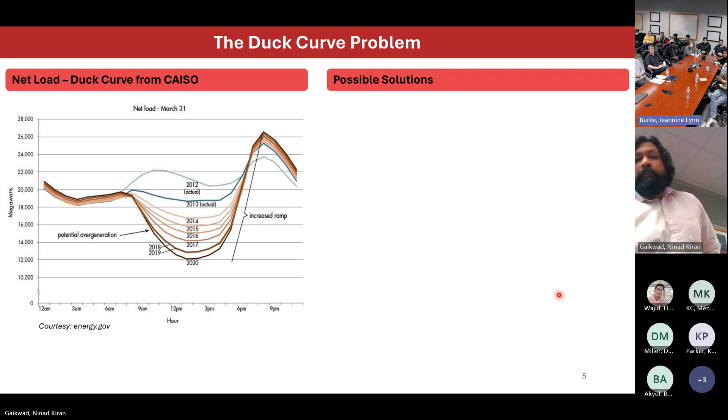As you can see, the net load curve, this is from CAISO, and this is a projection for 2020, and the actual was 2012 and 2013. The net load, which is nothing but the total generation minus the solar generation, the steepness during the evening time, the ramp up that is required, needs a lot of dispatchable generation. A few of the possible solutions are dispatchable generation like natural gas power plants, hydroelectric power plants, and energy storage at utility scale in the form of battery, thermal or chemical storage.

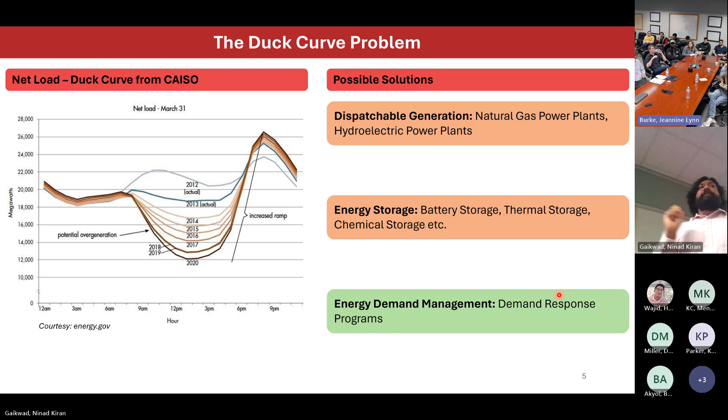But all these solutions require capital investment, and we do not want to use natural gas power plants to be fired if we want to utilize clean, green energy from solar. So there is another possible solution, which is energy demand management, or as we call it, demand response programs. Utilizing this in conjunction with the other two, we can try and solve this problem of the duck curve. In this talk, we will focus on energy demand management in buildings, or rather networked buildings at scale.

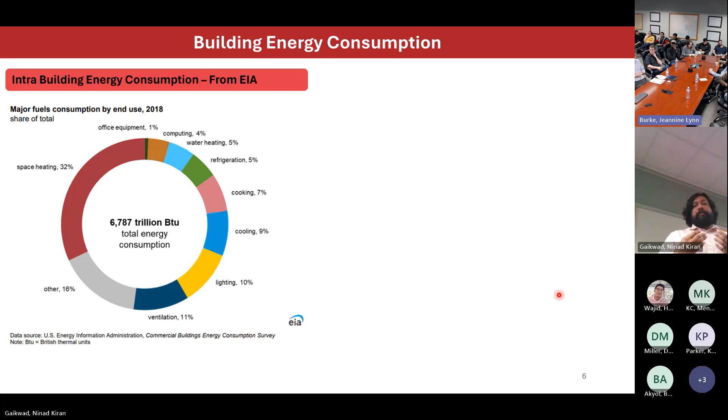So why buildings? What is so important about buildings? This data is from EIA - I always forget their acronym's full form - but as we can see, out of the total consumption within a building for different things, space heating and cooling is about 41%. So that is the HVAC system, which is 41% utilized in a building, and that provides us with a dispatchable load, because buildings have inertia. If you turn off the AC or the heating within a building, the temperature wouldn't change instantaneously, but rather it would take some time because the building has thermal inertia.

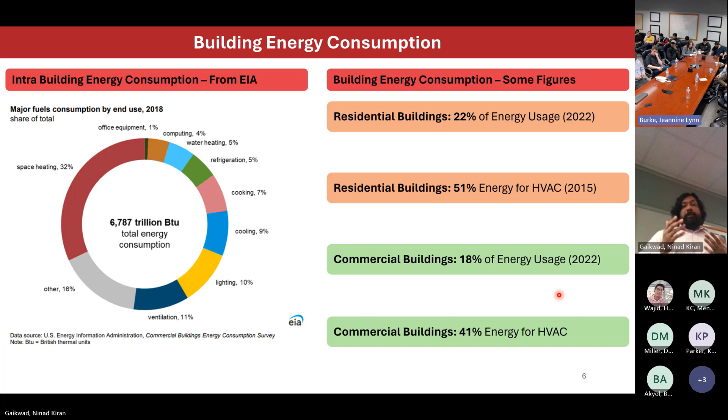This thermal characteristic of the building can be exploited in a demand response paradigm. The other thing to note is that out of the total energy usage in the United States in 2022, 22% was used by residential buildings, and out of that, 51% was used for HVAC. Whereas in commercial buildings, 18% of the total energy usage in the US was done by commercial buildings, while 41% of that was utilized for HVAC. So HVAC is a big consumer of energy, and if we can maneuver that, we have enough flexibility to help with the problem of the duck curve.

This comprises a building, which is not a passive thing, but rather an active participant in the energy grid. This building's behavior is basically dependent upon the ambient weather, how hot or cold it is outside, and what the people are doing inside of it. If we leave the building at 5 o'clock from a commercial building and go to our homes, the building energy consumption drastically reduces.

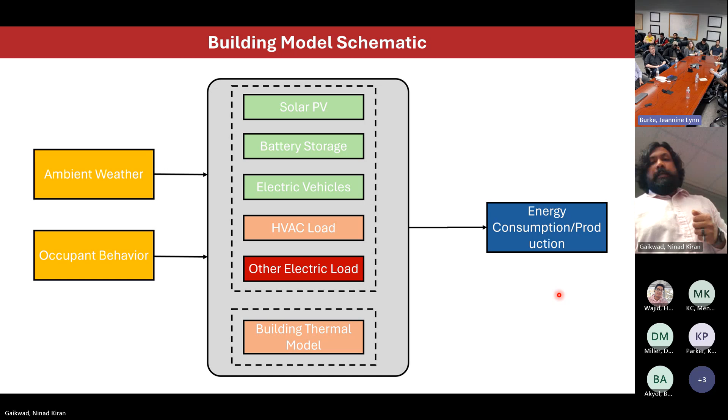So let us look at some simple models, starting with the solar PV model, which basically depends upon GK, that is the global horizontal irradiance, and TMK, that is the module temperature, where the module temperature is dependent upon TAM, the ambient temperature. Once you know the PV rated, meaning once you have the specification of the PV sheet, you have that model, end of story. You don't have to do much with it.

Similarly, a battery storage model can be shown to be something like this. It is a bucket of energy: the EBAT, or energy in the battery, at the next time point is basically what there was before, plus or minus how much was added or subtracted from discharging or charging. That's the battery storage model. If you know your battery, you would know from its specification sheet what efficiency it has, so you know the eta C and eta DC values. You don't need to do estimation for that.

Then you have electrical vehicles, which are basically a battery. The only thing extra in this model is PK, which indicates whether it is parked and connected, or not parked and away. Otherwise, it just acts as a battery.

The other electric load, like lighting and equipment, can basically be modeled as some schedule of that load. So for lighting in this room, the schedule goes from 0 to 1 from 8 a.m. to 5 p.m. And then if everybody leaves, we would like to switch it off. So S is the schedule of operation, and P rated is whatever the rating of your lighting or other equipment is.

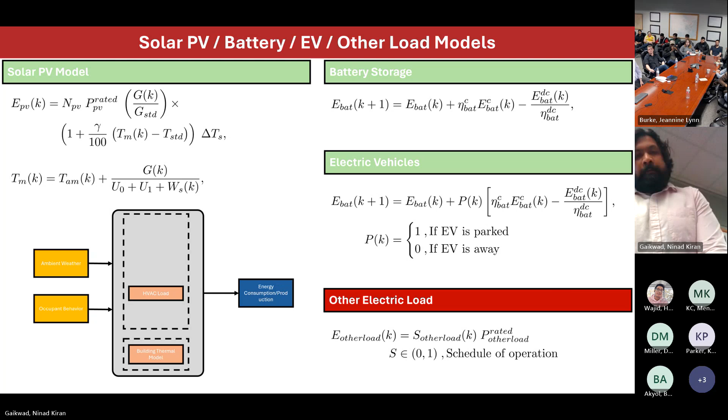Next is the HVAC model. Here we are very much interested in the PHVAC, that is the amount of electrical power the HVAC system is consuming in providing heating or cooling. In this talk, we consider that buildings are cooled and heated with electricity and not gas, just for simplicity, based on the work that has been done.

That PHVAC is some function of QHVAC, and QHVAC is the thermal energy required to provide heat or reject heat from a thermal zone. It is given by a physics equation consisting of Ca times the supply air mass flow rate m dot, the zone or room temperature, and TSI, the set point temperature of the incoming air. If that set point is hotter than the zone temperature, it will heat it; if it is cooler than the zone temperature, it would cool it.

A building thermal model can actually be very complicated, and we have an entire software called EnergyPlus which does a really good job of this. Heat equations are basically partial differential equations, but for us, we simplify the physics of the building thermal process into a 1D case, and hence we end up with ODEs, ordinary differential equations.

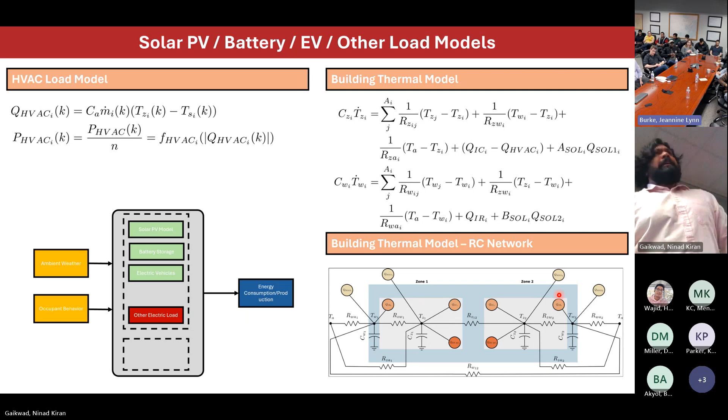Okay, is that clear? Yeah. Okay.

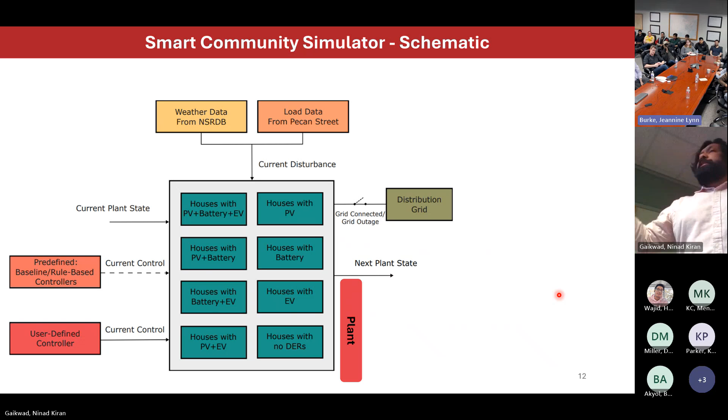So basically, having all that knowledge, we have developed a smart community simulator. It is in MATLAB, and the plant is such that you can simulate any arbitrary number of houses. Each house within that simulation can be heterogeneous or independent, can be a house with PV and battery, EV, just PV, or no DERs at all. The disturbances come from the load data for the house, from Pecan Street.

The weather data as a disturbance comes from NSRDB. We have provided predefined baseline and rule-based controllers so people can start using the simulator with baseline cases, and you can also define your own user-defined controller to control the simulator, or rather a group of houses. It can also simulate both on-grid and off-grid modes, and each house comes with an HVAC that you can choose to control or not, so it's very flexible.

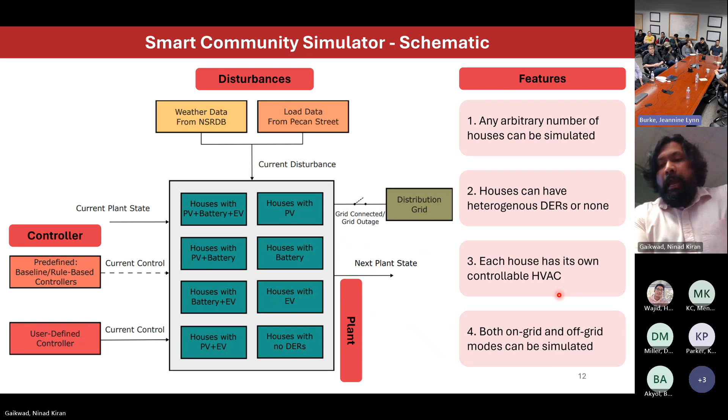So this is something we have built based on our knowledge of the models. And there is something we want to, or rather, let us look at some results too.

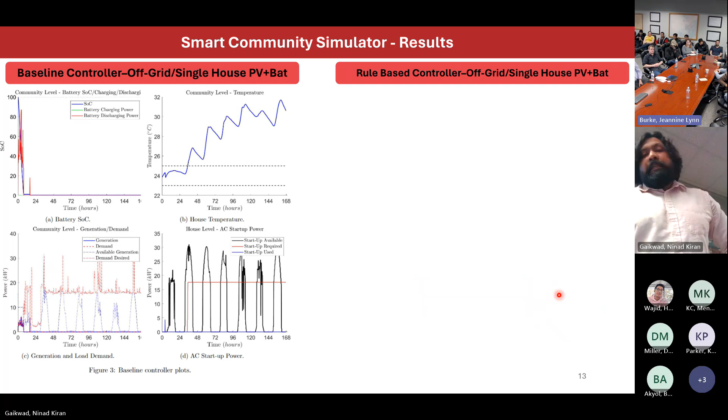All right, so the baseline controller — this is an off-grid case, just a single house with PV and battery. It's off-grid, meaning it is dependent only on its PV and battery for energy supply. As you can see, because the baseline controller is so dumb, nothing is served well — the temperature is not maintained, and the desired load is not served. So this basically shows that the simulator is providing proper physics.

At the time scale that we require it to be. Then we have the rule-based controller, which is a lot smarter than the baseline. You can see that this is better — the temperature is getting maintained somehow, and you are getting some desired load supplied by the battery and PV.

So this basically is to show that the simulator is ready if anybody wants to use it for developing certain kinds of applications. We have a simulator ready to do that for you.

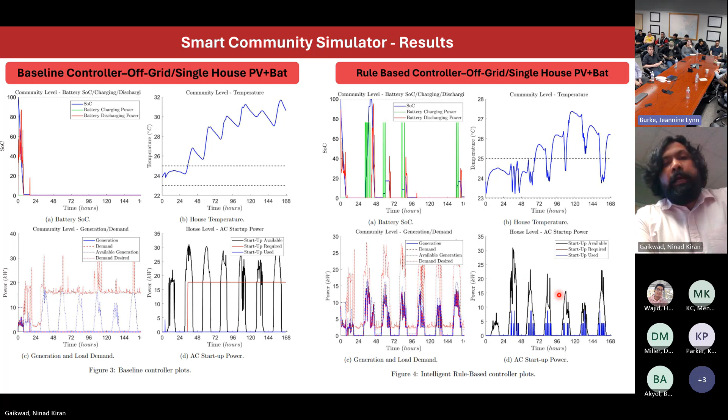The other thing we're trying to develop is a co-simulation workbench, where you will be simulating buildings, houses, smart communities along with OpenDSS. We will be using HELICS as the co-simulation enabler. We would have different Python scripts for recording the output of the co-simulation, and a particular Python script from where you can actually do the control.

Basically, that script would be an entry point to your control algorithm. We would definitely give you some basic algorithms like the ones we showed before, and all of this will be handled by HELICS. That is what we want to develop, so that we have this workbench going forward. So this work is in progress, and the idea is that any arbitrary number of buildings can be simulated here.

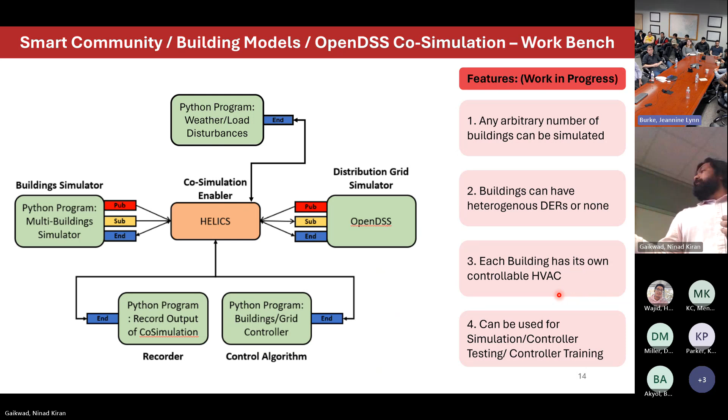Buildings can have heterogeneous DERs, or they can have none — they are just consumers. Each building will have its own controllable HVAC. This can be used for simulation, controller testing, or if you're doing data-driven control, this can serve as your gym environment, so to say.

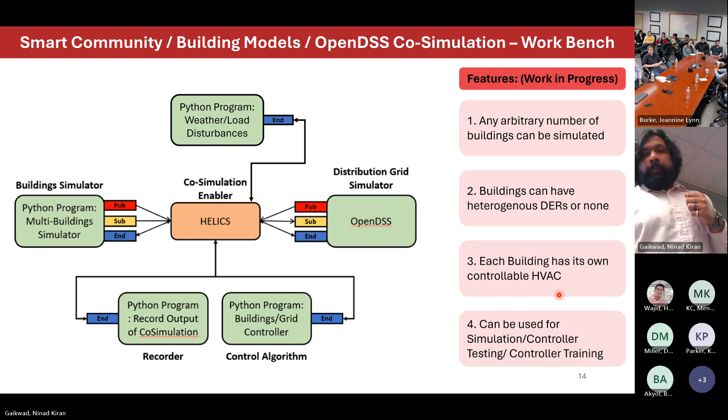All right, then we move on to model estimation.

All the models we looked at, like the solar PV model, the battery model, and other load models, we can just find from specification sheets and by knowing a little more about our building. But the thermal model, the RC network that you saw, is difficult — you cannot just get it, nobody is going to just give you the RC values. You will have to get some data, create your model, and test it. Once you have that model, you can do all those things in the simulator that we just saw.

So how to do that is basically model estimation. And what we do here is, because of a lack of real building data, what we started off with is the PNNL's buildings database.

This is a database of 16 different prototypical commercial buildings, and it comes with 19 different weather files. There are also some residential buildings, and two other kinds of buildings present.

What we do is use those files and pass them through EnergyPlus, and EnergyPlus gives us data. This data we process - basically the occupant and equipment data inside, the weather data, the HVAC loads and zone temperatures - all the data that will help us build the model further down the line. So data processing is done once you generate the data. We'll talk about it in the next slide, what we exactly do.

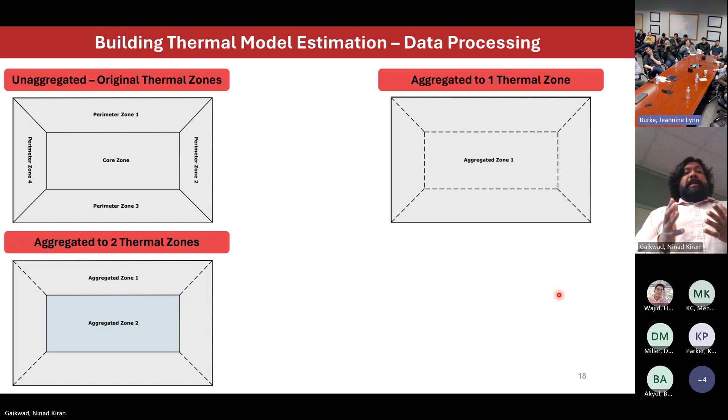For that, we basically start aggregating the zones. If you aggregate all 5 zones together as an average, you get one set of variables for this aggregated zone. Similarly, maybe you decide that's too bad a model fit and it can be done with 2 zones. Due to the symmetry of this building, you can consider the central zone to be one particular zone, and all other perimeter zones can be aggregated - giving you a two thermal zone aggregation. Similarly, a 3 thermal zone aggregation. And you can see why not a 4 zone version, because there is no symmetry to do that exactly here.

Out of this, the whole idea is: if we are able to get a single zone model for any particular building to work well for our energy control application, then we are very happy. If not, we have other ways of aggregating it and still coming up with models, which are a little more complicated and will take more memory and more time to solve.

Then let's say we have a multi-zone building model. There are 2 ways you can train or estimate the model. You can individually look at, say, perimeter zone 1 as an independent or uncoupled zone, and just learn an RC network model for it - basically learning an RC network model for each of the zones independent of each other. That would be an uncoupled architecture, which should basically give you bad results.

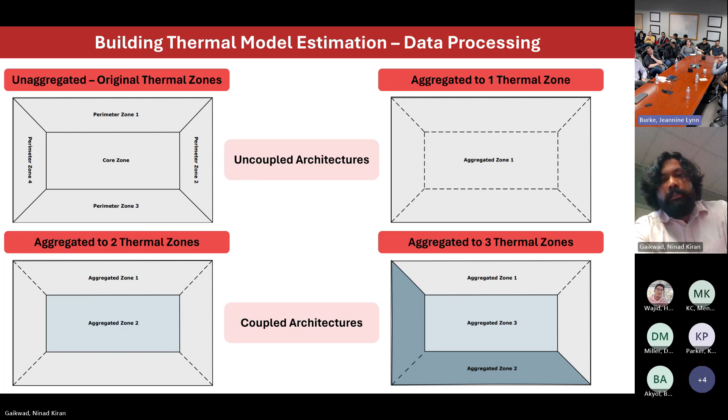Okay, so that is how we process data, and that is how we can develop our models. Going further, this is some modeling. We can return back to it if we have any questions, but for now, I think this should do.

So the idea is, once we have learned, if you can see this over here, this is the thermal model. This can be either learned through an ANN model, or we can learn the RC network directly through gray box techniques.

But this entire thing is showing you a simulator of a single building, which will be present in the HELICS co-simulation platform. The way it would operate is, you would have inputs going into the building, which are ambient temperature, solar irradiance, that is weather.

Then you have all the disturbance coming from people and equipment, and then definitely the HVAC control that you can have. And this input is exactly like EnergyPlus.

And this input is then getting converted into all the different kinds of heat gains that a zone or the building might experience. QSOL 1 and 2 are the heat gains due to solar irradiance. QIC and QIR are due to internal heat generated from people and equipment. And then QHVAC is the heat rejected or accepted by the HVAC system.

And in order to get the other four, QSOL 1, QSOL 2, QIC, and QIR, you have to create some regression models so that you can go from the EnergyPlus inputs to this QSOL. So we have to learn that, and EnergyPlus helps us learn that. We learn those regression models to generate QSOL 1, QSOL 2 from GHI, for example, using EnergyPlus data.

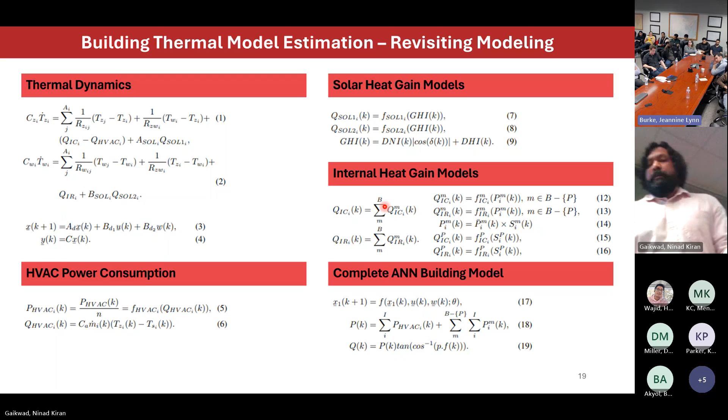So keeping that in mind, there are different ANN architectures that we are currently trying to test out. And this is no standard nomenclature that I have used. So I call this one time stepper 1, and it is not a neural state space model.

So basically, it is a vanilla neural network where X, U, and W become the complete input vector, and you learn some theta because you know X1 from your training data. So that's time stepper 1. It's like your network gives you the next time step state directly.

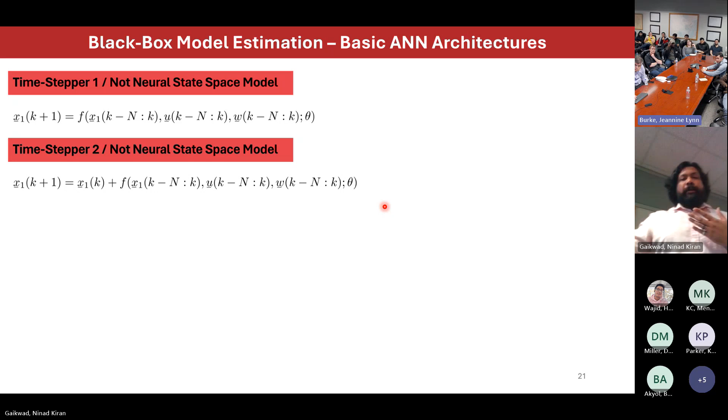The other one is the same thing, but your network now tries to actually learn the derivative of it, and you have to add the previous state to it. This has a kind of smoothing effect on the training and also the results. So this is time stepper 2, but still not a neural state space model.

So time stepper 1 and neural state space model would mean I will train two different models.

Sorry, it seems that somebody has a question. Do you want to take a question now or at the end? Which one do you prefer? Sure, I can take a question. Maybe see that, I don't think I can.

Hi, can you hear me? Yes, all right, great. Thank you for this presentation. This is Bora Akyol from PNNL. I missed a step here.

You described how we can model buildings relatively well, and we have been doing that for a long time using mathematical models. And then you jumped to the neural networks. I missed the motivation for why we would want to use a neural network to model the building space. So can you please say maybe a sentence or two about that motivation?

Thank you. Right, okay, that's a great question. Yeah, sorry that I didn't provide enough motivation for why we should use ANN architectures, or why shouldn't we just go to gray box modeling.

So the thing is, I'm trying to replicate EnergyPlus's model into a particular model so that I can use it at scale, with multiple buildings, in a co-simulation platform, which I wouldn't be able to do with EnergyPlus given the computing hardware I have. The idea is that with the machine learning training paradigm, you can use a lot of data to train it, unlike a constrained optimization problem to learn the RC parameters, where maybe you can do it with 3 to 6 days worth of data and it is good locally.

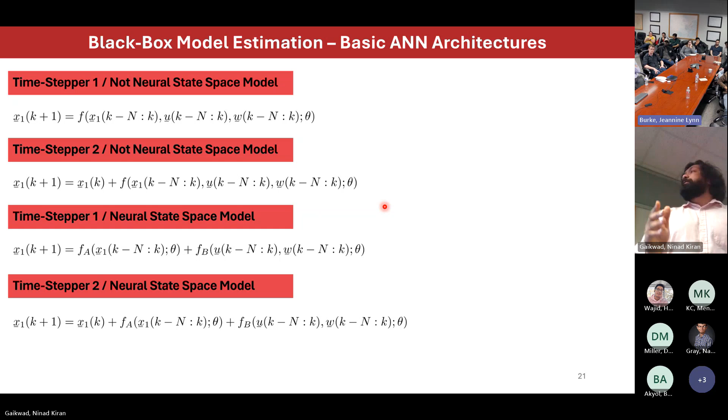This entire exercise is also because there is no central place where we can see that all of these have been applied to building data and see what results we get. So that is one motivation to look at all these different models, because I don't know which one is going to work better. But in literature for dynamical models, these are the basic ways you can train a neural network to do that.

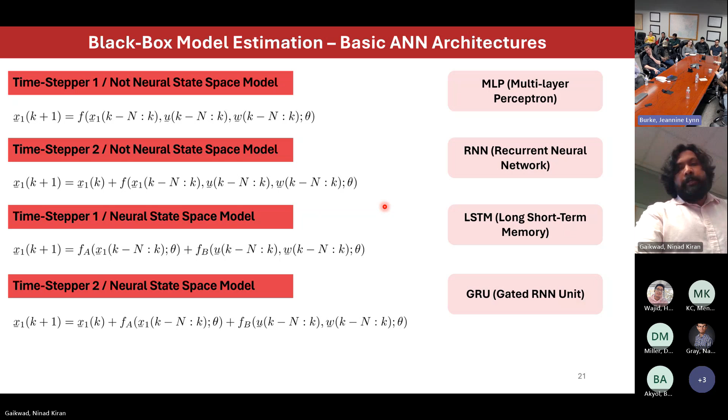Okay, any questions? Okay, let's move on. And then you can use MLP, RNN, LSTM, GRU. That is what I'm using to populate those models in a particular way.

If you look at some results, these results are for time stepper 1, not a neural state space model. Each row is the different kind of neuron used to create the layers, and the columns represent the aggregation zones—this is still the 5-zone building, the small office 5-zone building. The blue color is for the coupled simulations, the red color is for the uncoupled simulations, and the black is the actual temperature.

Just having a look at it, you can see that the coupled version learns it better. The weirdness you might see in the other ones is because we haven't done hyperparameter tuning properly, and we have also restricted ourselves to the data—we haven't messed with the input or schedules so that we can get richer data out of the generator. So there is some scope for improvement, and we are working on it.

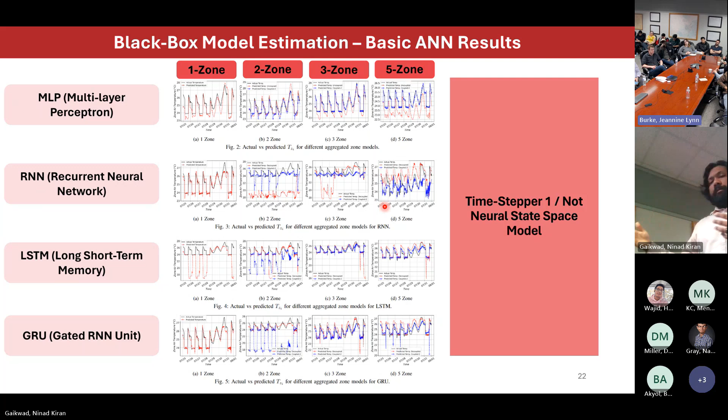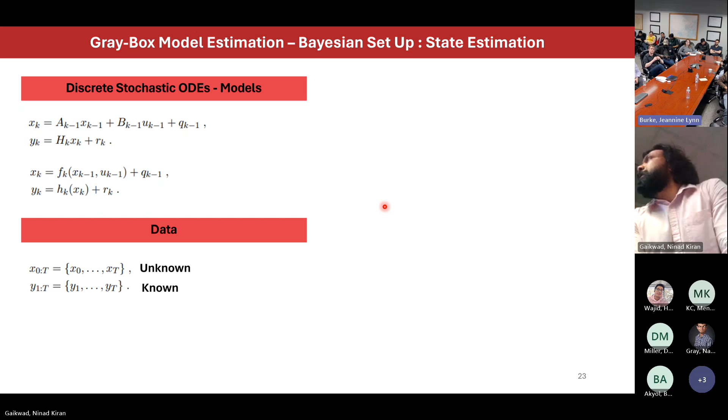All right. Okay, gray box model—this is something we are trying to do, and we're very open to suggestions. Basically, discrete stochastic ODEs—apologies if that's not an exact stochastic equation—but the QK and RK are Gaussian noise processes, not processes, but rather distributed with a zero mean Gaussian. If you can represent your ODE in this fashion, which we can do for our linear ODE system for the thermal dynamics, then you can learn these parameters with a Bayesian setup, and that is gray box model estimation.

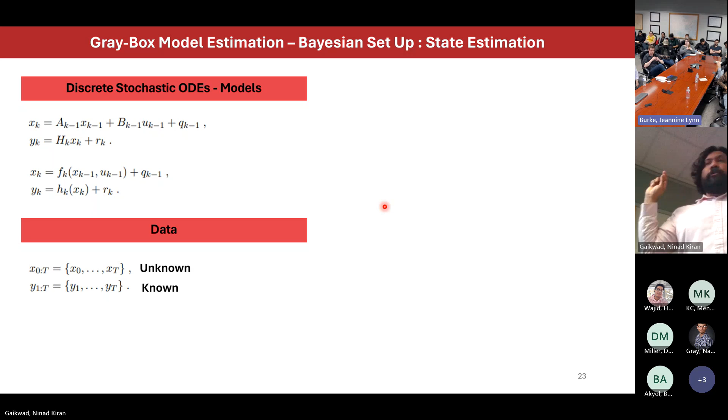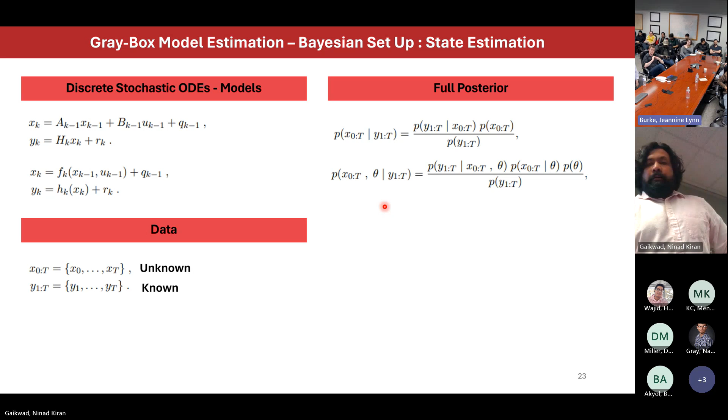Where the data is such that you can only know the output, and the output is the measured quantity, which is just going to be the zone air and not any other temperature state that you might model. Basically, a Bayesian setup means that you compute the full posterior and then work through it, and the way to work through it is basically through Bayesian filtering and smoothing.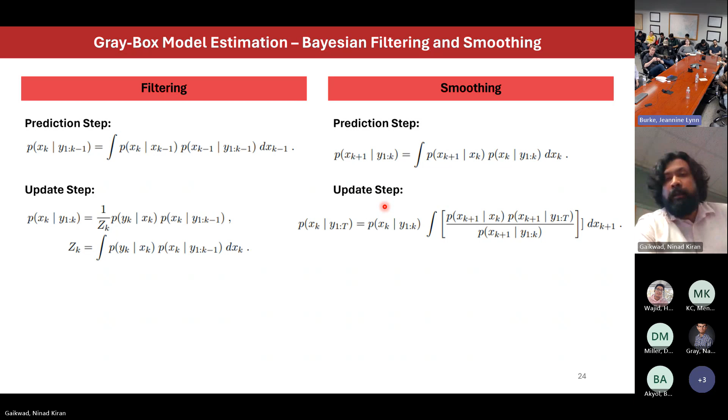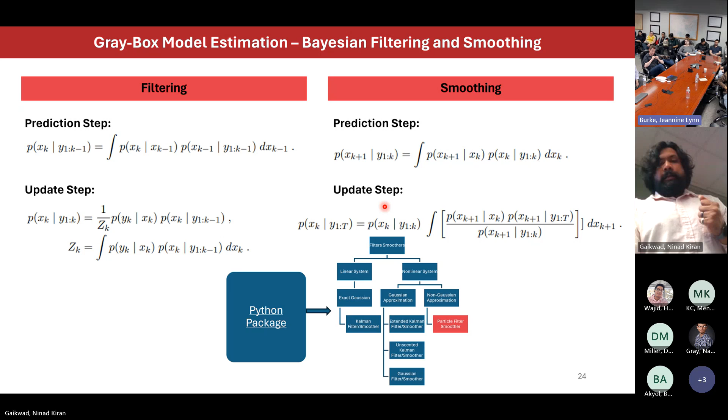These help us in doing at least the state estimation. I'll be sending out this PPT, and there is a link to a GitHub repository if you want to use the Kalman filters. We have developed almost all of them, apart from particle filters—all the filters and smoothers—and I think it's a good package to use if you need it.

So the other setup is what the actual problem is. We are in this model estimation paradigm, and we saw that through filtering and smoothing, we can at least estimate the state. But we want to estimate not only the state, but also the parameter. Then the setup becomes a little different, where you need a prior on your theta, and then you have everything conditioned on theta as well. Over here, you still don't know the hidden states, you don't know the parameters, but the only thing you know is the measurement coming out. It's a difficult problem to think about.

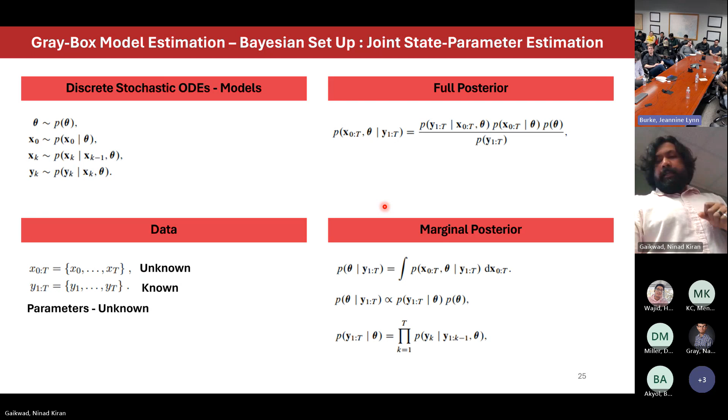Even over here, you have the full posterior, and then you get around it through the marginal posterior, and you work through it, and you see that the filters and smoothers help us later in actually computing this and coming up with the joint state and parameter estimation.

So the algorithms currently, our work in progress, that we are utilizing, I would call it a naive NLP. I'll go fast, if anybody has any questions, just raise your hand or shout out. But yeah, this is a naive NLP. It is a constraint optimization problem.

It's to minimize the squared error between what you have observed and what you would be estimating as y. The constraints are nothing but your dynamics and the output equation, and then you have constraints over your states if you know what constraints there should be. If you know some good bound constraints for your theta, they are welcome too.

The other one we are trying to see is the state augmentation method, where you basically augment your dynamics with your parameters and then utilize the filter to simultaneously estimate state and parameter. It is not a foolproof solution, but it's something you should start off with. If it works for you, it's good. But we will have a more concrete discussion once we have all the results ready.

This is one of the easiest ways to set it up if you have that package, or your own package for doing Kalman filters or other types of filters, because here the filters wouldn't be Kalman. They would have to deal with nonlinear systems as the state would be augmented.

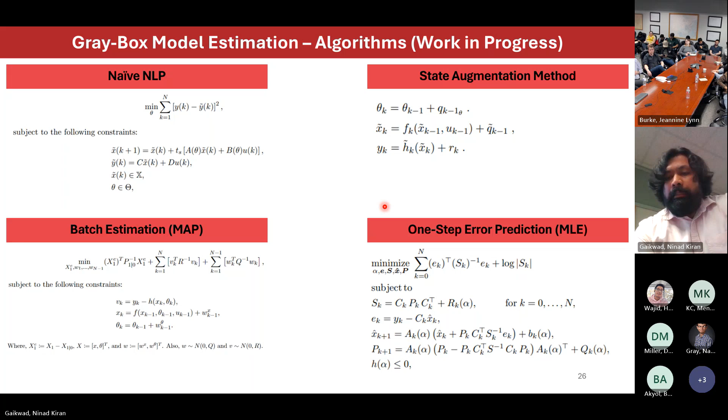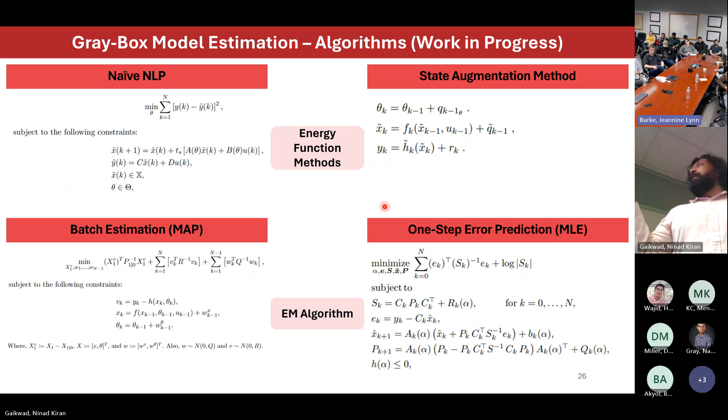The other things we want to work on, compare, and see which ones to go for are energy function-based methods and EM algorithms. For brevity, I haven't created slides for the mathematics of it, but we will have results for those as well. So these are all the algorithms we're trying out on the building data we generated from EnergyPlus.

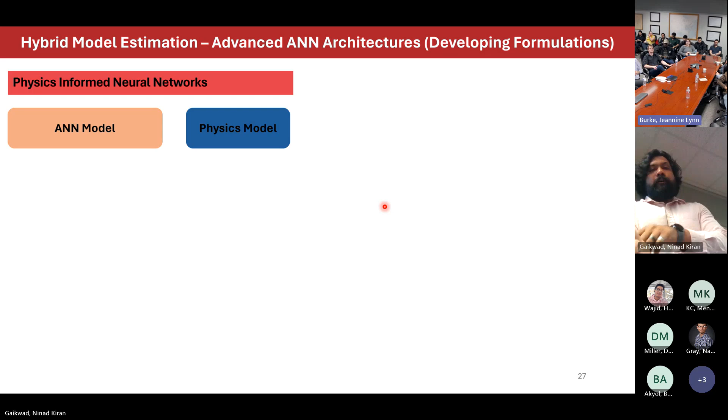Then I would like to move forward by going into physics-informed neural networks for the future. We have a really good candidate, neural ODE, and I would like to see if there is any extension possible with physics-informed neural ODE.

I'm trying to develop a formulation for the PINN, and given the kind of problem it is, because it's an inverse problem for me as well, since I do not have access to the RC parameters, and I do not have access to the state either, it's a little tricky how you could get that to work, at least for me at this point. So these are hybrid models combining both machine learning and physics, and I plan to work on them, get a good hold on them, and come up with some results.

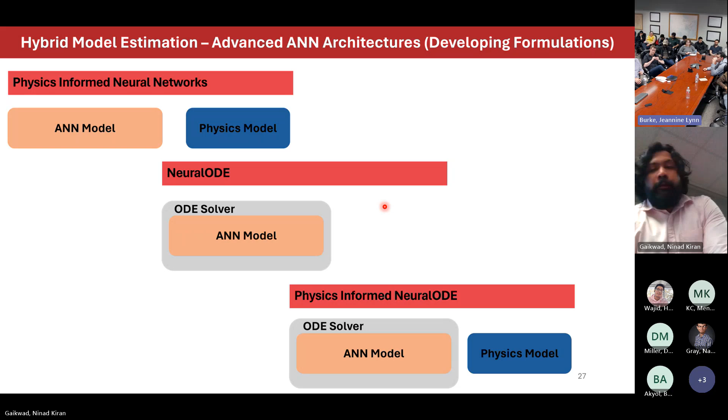Any questions? Is this the last slide? Yeah, five minutes, five to ten minutes. Is that okay? No, that's good. No, because you asked the question, I thought that.

All right, so we have looked through the mathematical modeling.

We saw that we can come up with simulators and test benches and stuff. We saw the elephant in the room is the thermal model for this large scale simulation. And we saw a few techniques we can use, from gray box to black box, to identify that model and convert it into a simulator so we can use it in our application. So now we should look at what the control is, like how can you actually do the control if you have all of these things.

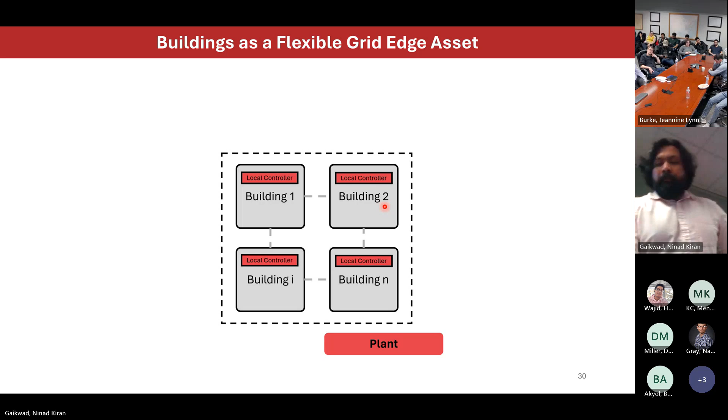The disturbances, as always, are ambient weather and occupant behavior. And the objectives are, what do we want this system to do for us? We want it to produce some ancillary services, like help flatten the duck curve. We want the buildings to reduce energy cost, and the most important thing, do all of these things while maintaining occupant comfort. Otherwise it wouldn't be a good control strategy.

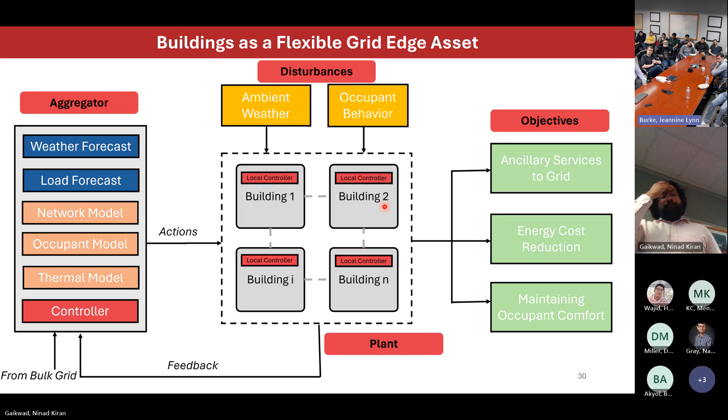So how would we do that? We are envisioning - well, this is out there in literature - how we model the aggregator. We're not there yet, but we think an aggregator would need to have some kind of weather forecast. It would need to do some load forecast. It would need some understanding of the network model. It would need to know about the occupant model, and definitely the thermal model. Based on all these models and forecasts, it can come up with a controller which can send an action.

And for us, the action would be a price signal sent to the buildings. And the local controllers would take that into cognizance and change their behavior. The price signal would be such that the aggregator is the real intelligent guy here - he knows the buildings he's controlling, and knows exactly at what price point he can get this group of buildings to do what he wants. That will be a kind of a game between them.

And that is what we envision happening. For that, we are trying to get everything built. That was the purpose of this talk, to show what we are trying to do and where we are at. So this is what we intend to do, slowly and steadily.

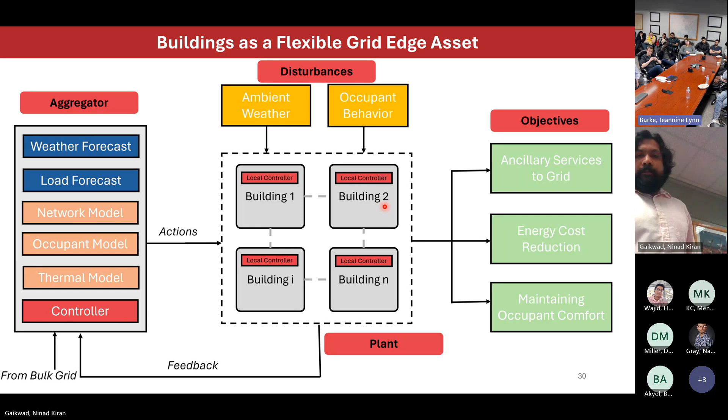The other thing is, what kind of control are the local controls? I'm not going to touch the aggregator at this point, but what is a local controller, what is an intelligent local controller? An intelligent local controller has to be based on some kind of optimal control paradigm. The easiest ones to understand, or rather currently applied to buildings, are MPC, model predictive control, and RL, reinforcement learning. So we'll see a use case of each of those quickly.

So model predictive control for a small house. Model predictive control converts a control problem into an optimization which it solves at every step. It takes in information, it has some future information, it has the dynamic models - over here the dynamic model is the refrigerator, because this is a small house. The objective is basically to maintain habitable conditions inside the house with just a small solar PV and a small battery system, after a hurricane has hit and they don't have access to the grid, and might not for the foreseeable future, like Puerto Rico - six months, who knows?

But they have the system, and we need to come up with a controller to help them basically survive. Survival here would mean my food doesn't go bad, so my refrigerator is always almost served. And then I should get light during the nighttime, and maybe a fan when I sleep, that kind of thing. So it is a small system.

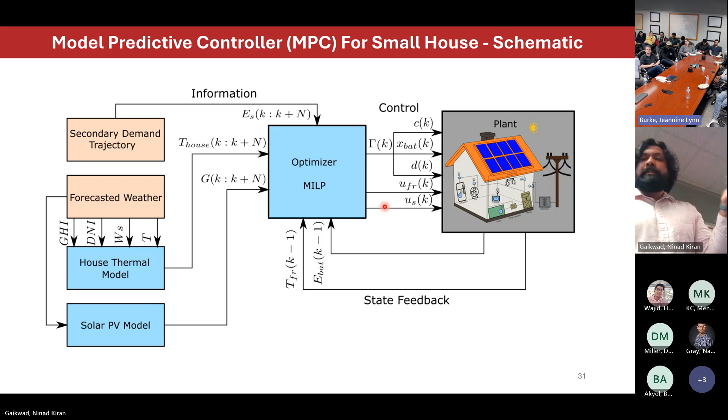And then it can be formulated as a MILP, or mixed integer linear program, because of the on and offs that have to be done for the fridge and the secondary load, which is nothing but the lights and the fans. And it turns out to be a MILP.

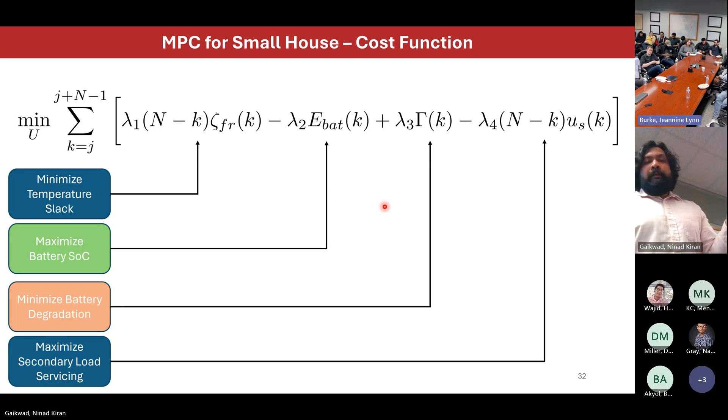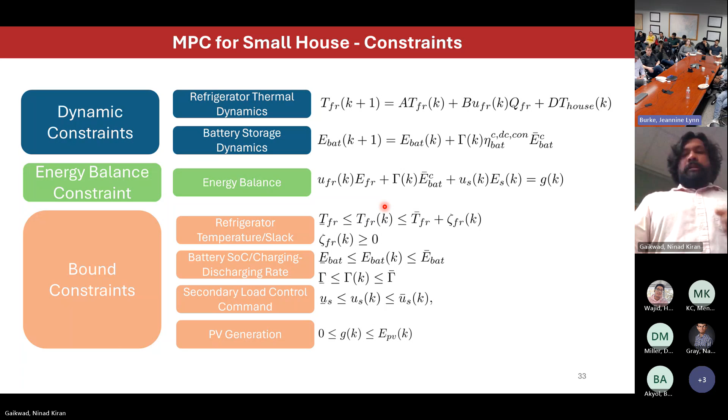And you have a cost function—I won't get into it—that tries to achieve the objective I just said. You have some constraints, which are nothing but dynamic constraints: the dynamic model of the battery, the thermal model for the refrigerator, an energy balance constraint, and a bunch of bound constraints so you can tweak the solution the way you want.

So this is what we got. The columns represent the controller, the rows represent the primary load, which is the refrigerator, and the second row is the secondary load, which is the combined lights and fans that were served.

And if you can see, the MPC controller did better than the baseline. It was able to do better because it had some future information. It was based on an optimization problem, and it could make good trade-offs like we do when we have choices—we make good choices because we have intuition. We can see the future through either data or the dynamic models, and hence the models are very important for model-based control.

I think me and Shishir worked on a paper recently. I haven't put the results here, but we have controlled HVAC in a house in a certain kind of situation—a more complex problem. We can discuss it later. But yeah, this is the MPC for this house.

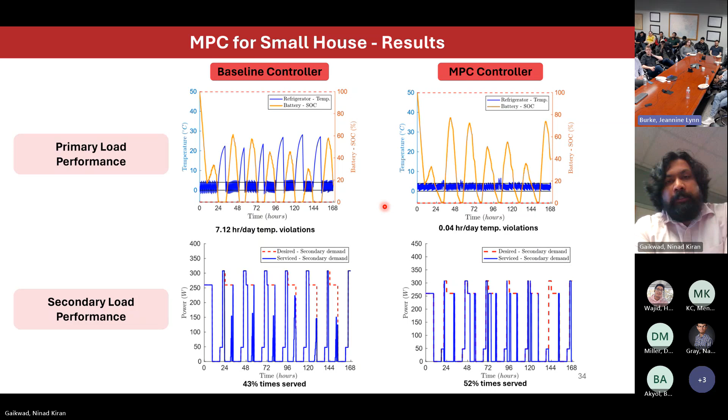Now, a similar problem: you have this house, you have this controller which is based on MILP. I used Gurobi to solve it—Gurobi is a commercial solver—and I used a good machine to solve it. And you wouldn't want to have...

I don't know, like a PC running to run your optimization in your house, right? It should run on something like maybe a Raspberry Pi. It's local and doesn't take as much power, doesn't need much computing. But if you formulate your problem as an MILP, it will be difficult—you would have to write your solver on your own, which I'm not ready to do at this point.

So I would look for some other options: can I do the same thing with simple computation? When doing real-time control, that control should be simple—it shouldn't need an MILP solver. Can I do it? And yes, the answer is yes, you can do this through reinforcement learning.

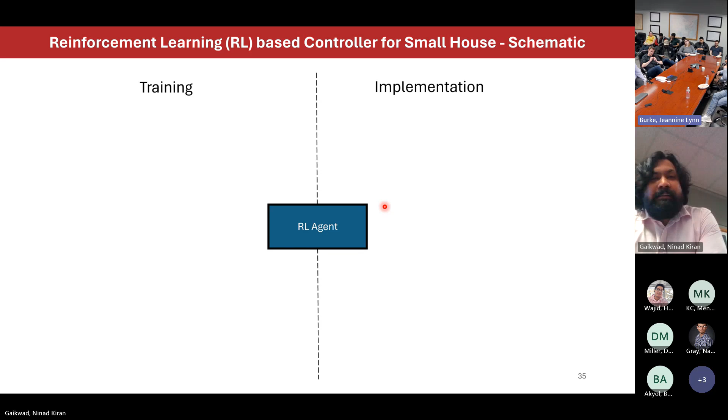There are two parts to reinforcement learning. One is, because it's a machine learning technique, you need to train it, and the other part is that you implement it. Everything is currently done on a simulator. So to train it, we are using the ZapQ learning algorithm.

It's from Sean Meyn, University of Florida. It's a faster version of Q-learning, based on matrix gains and ODE flows and that kind of analysis—a good algorithm, a step up from Watkins' Q-learning.

And then you can implement it. Basically, you need to provide the agent a state or an information vector at time t, and you should be able to give it a cost. I relate it to cost because the control engineer in me sees no reward, only cost—so I don't talk in terms of rewards here.

So cost is nothing but reward, essentially. You provide state and cost, and based on that the agent learns—as training progresses it takes better and better actions based on its state. Once training is done, based on certain parameters, hopefully all the thetas you're trying to learn have stabilized, and then you implement it.

Implementation here is very simple—it was just a minimum over 15 values because we have 15 discrete control commands. That's all. If you learn the Q function over these U's, you compute the Q function at xk, get 15 values, and find which is the smallest Q value in this case, since it's cost-based. The U relating to the smallest Q value for that state is the best U for you.

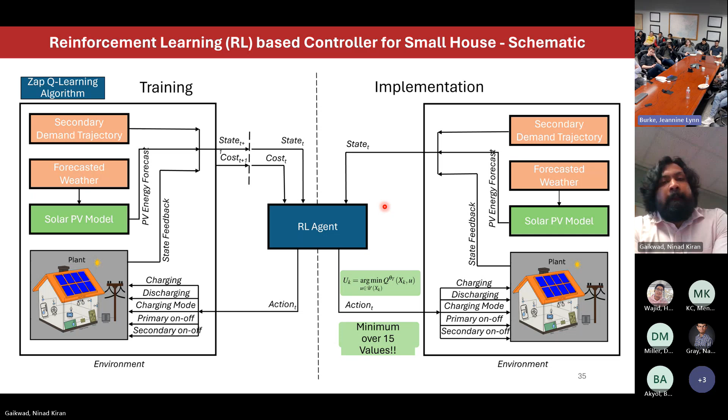We don't need to get into MDP basics, but you need to get the optimal policy. You have a definition for the Q function. You want to minimize expected discounted cost. Basically, the argmin of your optimal Q function is your optimal policy. And the ZapQ learning algorithm helps you learn that Q function in an optimal manner.

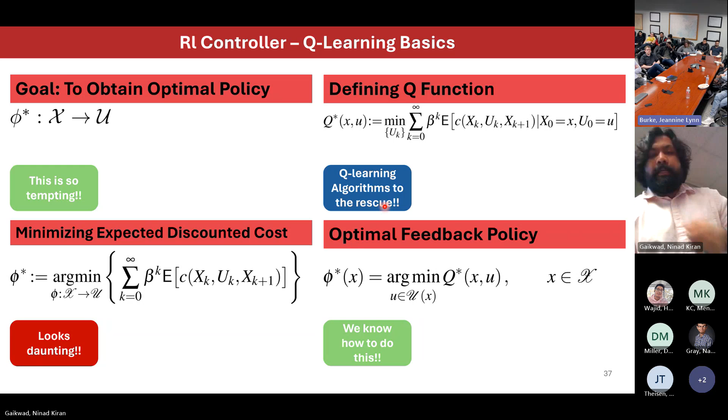The state space over here is interesting to look at. What is the state space? It is the current battery SOC, the current fridge temperature, the current house temperature, all of these things, plus a little bit of future information. But this reinforcement learning approach doesn't have information about the model, since it's model-free. Whereas the MPC had a battery dynamics model, with which it could compute what will happen to the battery, over here it just knows one value, like what is my battery currently. That is the information you provide.

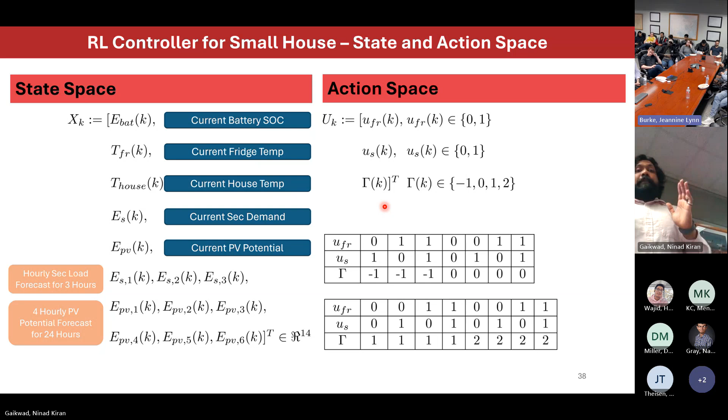You have all these possible actions, and there are 15 feasible actions. If you go through it, it's quite simple. Our state space is infinite, and our action space is finite. This can be handled by Q learning, and we are very glad that that happened.

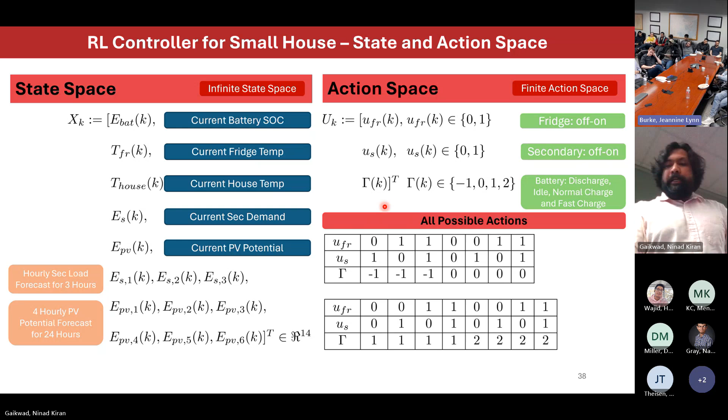Then you create a reward function, a cost function. You want a cost to maintain your refrigerator temperature. You want a cost to keep your battery alive. So all those objectives that we talked about in the MPC can be formulated as costs in an intelligent manner over here. We don't go through the math of it, but if somebody has questions, we can go through it. We have all those.

Then we use a linear approximation for the Q function. We have a particular basis function, a particular f of x, and we need to learn 435 parameters. Real-time control is just an argmin over 15 values, very quick real-time control once it is trained. Training is hard, and there are a lot of things that you need to take care of, similar to hyperparameter tuning in machine learning.

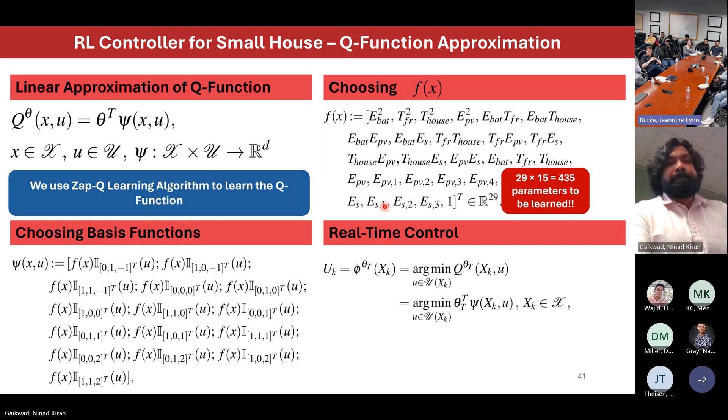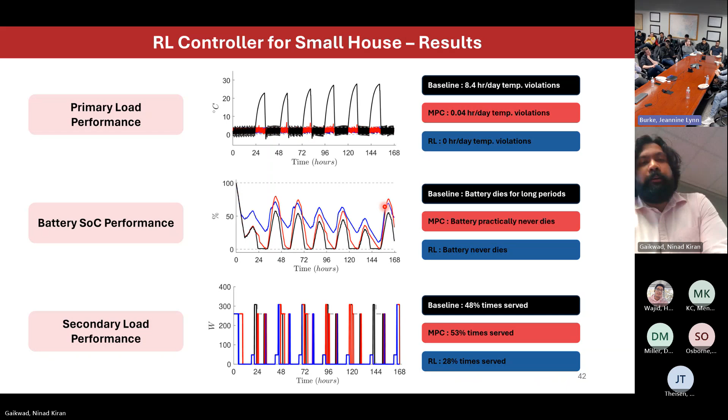These are the results. The black plots are for the baseline, the red plots are for the MPC, and the blue plots are for the RL. The RL performed really well for maintaining the fridge temperature, but it didn't optimally do it as well in terms of battery management. You can see the red one touches 0 and then starts charging, showing the model information comes into handy there. It wasn't able to learn how to provide for the secondary objective. That is something that you have to tune and get done, and sometime in the future we'd definitely try to do that, but not in this problem, maybe some other problem.

That was most of the talk. I'd like to conclude. Intelligent control depends upon linear algebra, probability, optimization, some estimation knowledge, optimal control, and machine learning. I've been in grad school long enough that I was fortunate to go through all these courses and understand something, but I know it's a challenge.

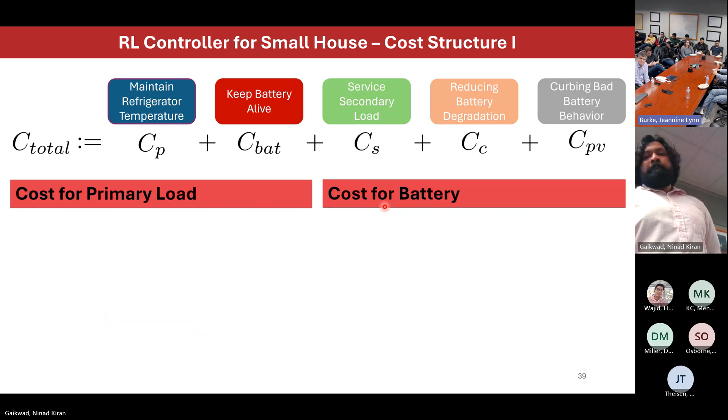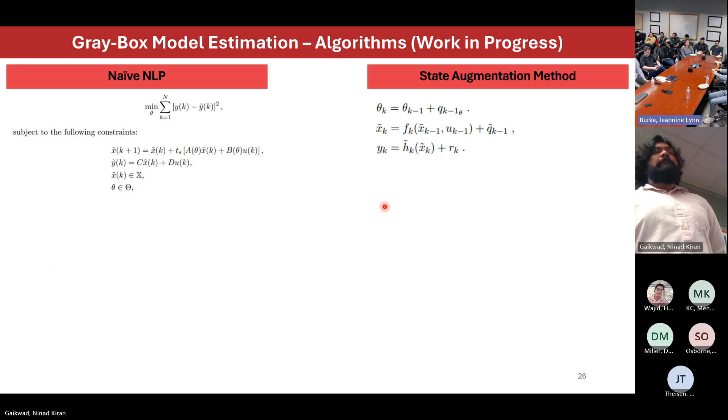I have a question about your model parameter estimation. I think I might have missed it. What are the inputs while you are trying to estimate the parameters of your models, and how do you do it? And which one, the gray box? The gray box, yeah. I've kept it simple because it was a nice presentation. Simple in the sense, even in terms of modeling it for either case, it's the same. It basically stems from the two-state ODE model.

And hence things become a little easy to manage. Get there. Oh yeah, here, right?

So if you want to learn an RC network through gray box, or you want to learn an ANN, basically you want this: the model to give you the next state if you give it the current state and all the disturbances and the control. So you need ambient temperature, you need all these heat gains, and you need your heat gain from your HVAC.

So right now you are getting this from Energy Plus? Yeah, so I'm getting all that data. The input data comes from Energy Plus in a particular manner.

Okay, the regression that happens over here. So basically, Energy Plus definitely gives me QSOL1, so that I can basically create a model between GHI and QSOL1, because Energy Plus will be doing it in a more white-boxy way with more equations and more detail. And I think that detail can be captured enough, not exactly or accurately, very poorly maybe, but that is seeming to work over here. We wanted to keep it simple, and definitely QSOL1 and QSOL2 are not linear, but we still have the linear models.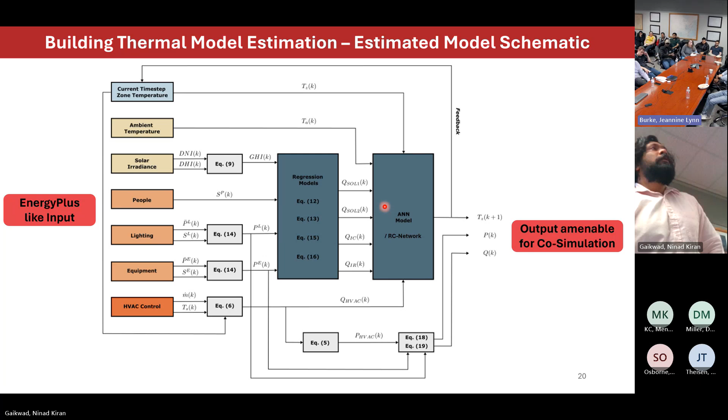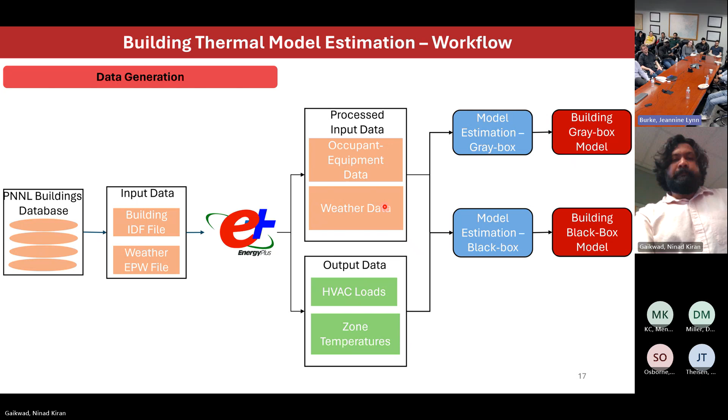Yeah, so this room, if it has a thermostat, which means if I change the thermostat, there are these vents which will be affected through the building control system, and be like, okay, stop the airflow or increase the airflow. So that particular volume in the building whose temperature can be controlled independently is called a thermal zone. So then in that building, there are five regions that can be independent - temperature can be controlled independently, yes. But because they are in contact with each other through walls, there is some coupling in the heat transfer.

Okay, nice. Any other? Yes.

How much control would a customer maintain over their HVAC, and how would you get them to trust or maybe incentivize them to have the control be done elsewhere? So the way we are thinking about it is a house or a building will have its own intelligent controller, it will have its own objectives. One of the objectives will be, should I support the grid when the grid sends me some signal, the aggregator sends me some signal? How do you want to apply that? Maybe you're like, no, I don't want to support it. Somebody is like, yes, I will support it, maybe tweak that parameter. So it is completely under your control.

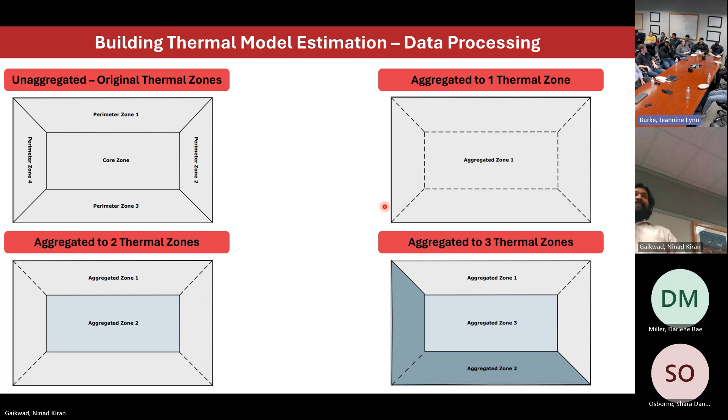Yeah, cool. But we want to try it out on all the possible buildings, and this is so many variations, right? Some buildings have like 40 zones. How many variations of this would you want to do?

So my plan is to get everybody to one zone. Let's see what the one zone performance is, and then talk about it. At least we have a fixed, concrete way of doing it, and then we know if there is enough time, people, and automation, you can keep creating and checking it out. But definitely a plan to do all 16 different types of buildings as a single zone, doing all these models and coming out with which model is the best.

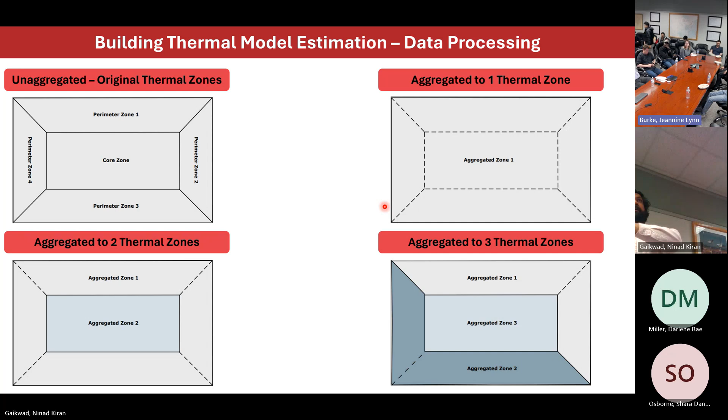I really hope the physics-informed ones, and the physics-informed neural ODE one especially, it is difficult to formulate, I'm still learning, but if that turns out well, it has all the characteristics this problem requires. You need some physics, there should be physics, but I haven't seen anything which does neural ODE along with PINNs or equations. The other thing is that everything I see has no control - everything is a state, every ODE is just talked about as a state. It's difficult to find a paper where we talk explicitly about this is state, this is the control, and this is how PINNs is going to work for you, or neural ODE is going to work for you. So it's always like the traditional ODE thing where there is no control, just the state working through - at least what I have seen. And I'm trying to find out more.

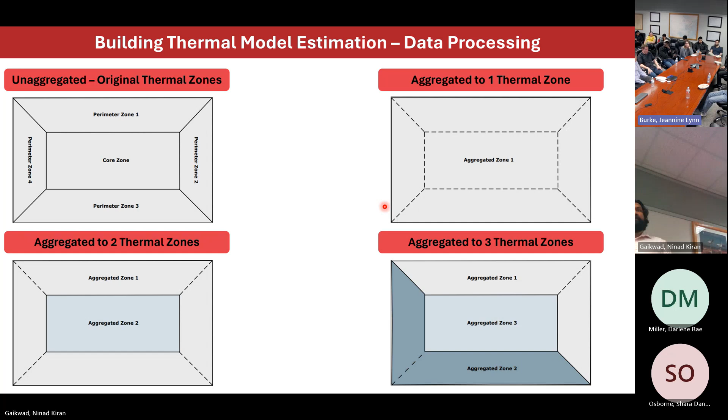Sure, but sure, yeah. Okay, thank you. Yeah, welcome. Okay, last lucky person - you're a lucky person.

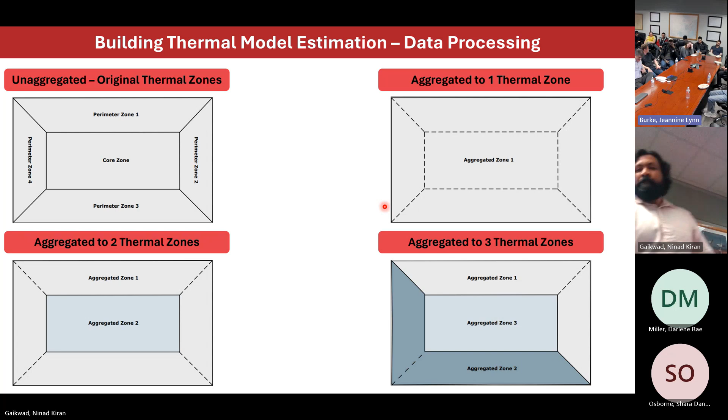I'm trying to relate this with the duck curve because it actually looks like this is a solution that can be implemented over the 24 hours of a day. It doesn't have to be just at the ramp, right? So I'm trying to understand why it has a peculiar importance for the ramp when it can actually be used 24 hours of a day. But I had to motivate it, and the duck curve gets us going. So I know it can be used throughout.

The other thing I just couldn't make a slide for was about network congestion, because they are not just consumers, but prosumers, and we don't know how bidirectional power is going to play out. The other thing is they are a good resource - this is the flex, this is a virtual battery. You can turn it off, turn it on, even at half-hour intervals, and you won't feel anything. The thermal inertia is there, and that has to be exploited one way or another. It's an intelligent approach to do it - these become virtual batteries, and then maybe we don't have enough flex, so we put in some more batteries for good integration of PVs and wind.

So in modeling your battery, did you include the dispatchability of the battery, like did you use cycle charging or load following kind of dispatch? So control, you mean, like what kind of control does it follow? Whatever you like - it's just a model. The way you want to control it, I'll give you the control commands. These are the things you can change to make it work. You figure out a way to do it.

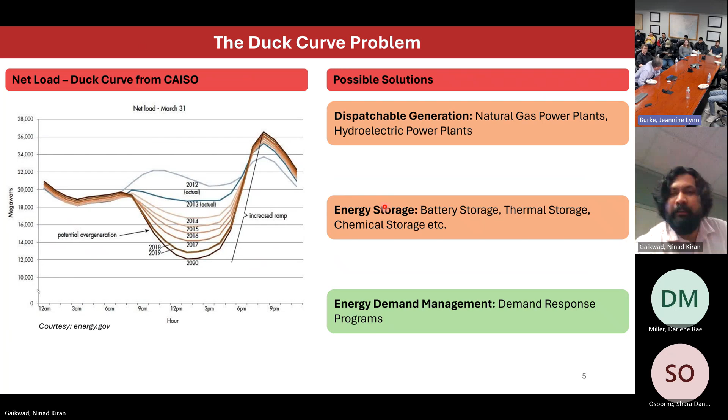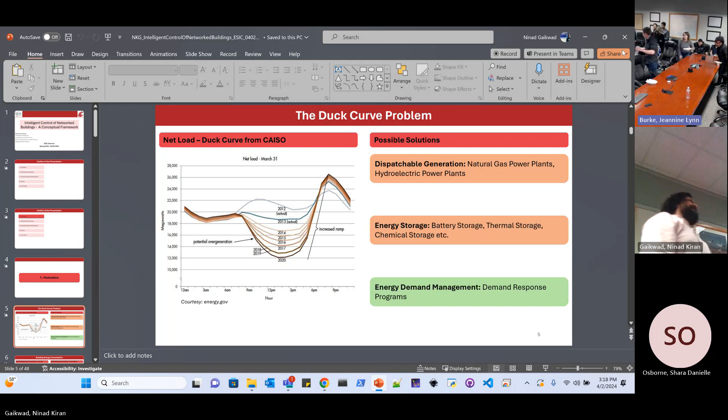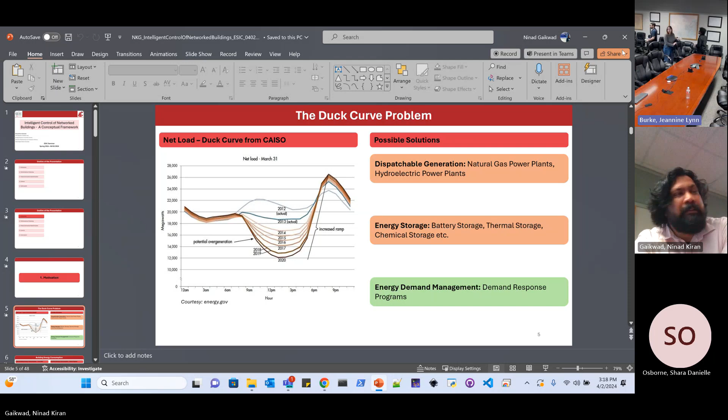Actually, the time - Jeannine, is it okay to shut down my PC yet? Our guys kind of used 15 minutes to serve the food before everyone got ready.

You didn't ask me a question.

So what about people's cell phones? Like, you don't take them into account?